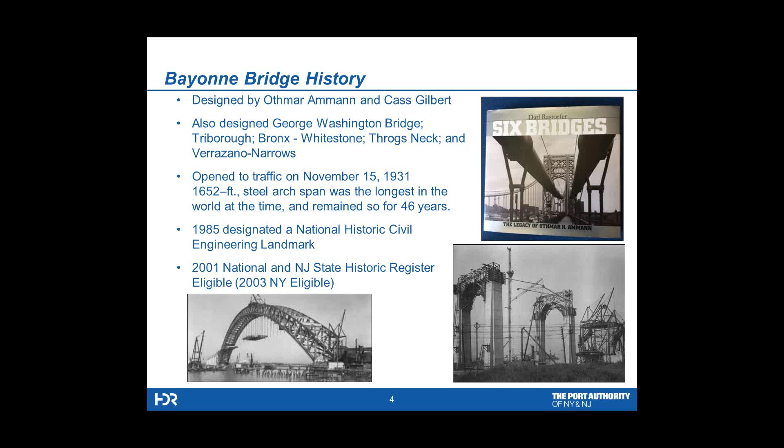So the existing facility is about 7,000 feet long when you combine the approaches in New York on the left and New Jersey right. And the bridge itself spans over a shipping channel called Kill Van Kull, and that's the entrance to the container facilities.

And if you look in the lower left-hand picture, that's just a barge, but the container facilities are to the right on the other side of the bridge.

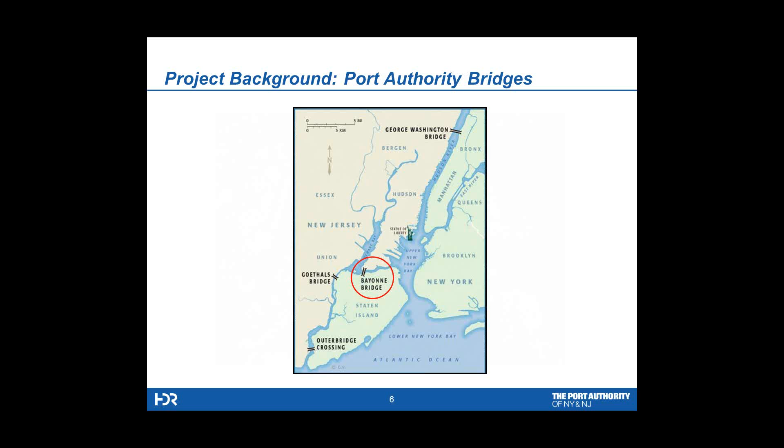The Bayonne Bridge connects New Jersey at Bayonne into a borough of New York City called Staten Island. You can see the Bayonne Bridge down there on the southern edge of the peninsula going into Staten Island.

The big interest in the Bayonne Bridge, it only carries 22,000 vehicles a day, but it happens to be in a location where we can see the shipping patterns for the

containers come in from the lower bay of New York, which is on the right, and going under the Verrazano. And then it goes under the Bayonne Bridge and it heads towards Port Elizabeth and Port Newark, which are the container facilities.

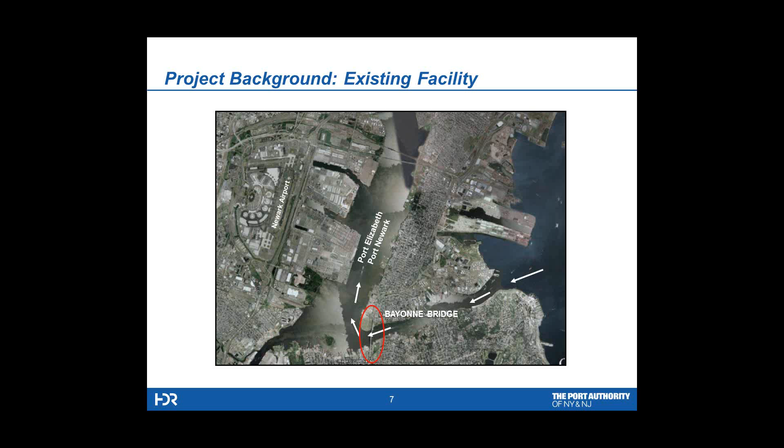So all traffic going to Port Elizabeth and Newark needs to go under the Bayonne Bridge. The current, what's called air draft, is 151 feet. The water draft was recently dredged to a 50-foot depth.

So the expansion of the Panama Canal, we're going to have bigger ships. The design is for 215 feet for Bayonne. The newer ships, the 13,000 container ships, are going to be about 200 feet in height above the water. The Verrazano Bridge, which they must go under first, is around 220 feet currently.

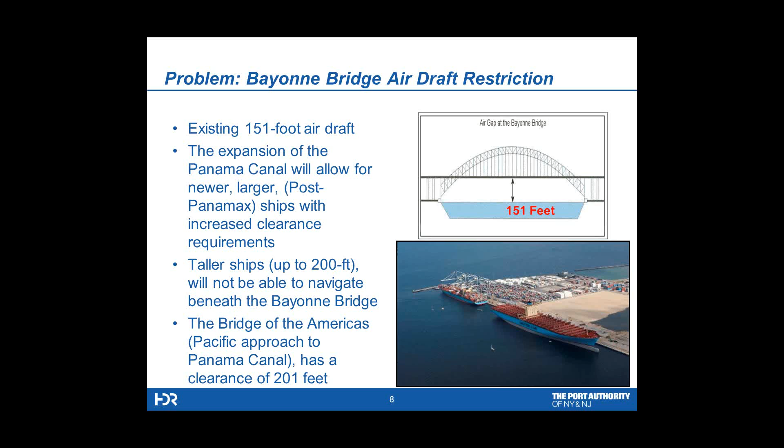So here's the cause and the reason for the project. We have basically a service of 5,000 TEUs, a TEU being a term to denote a container, and we're currently servicing 5,000 TEU ships at the port. We're expecting now to go to 13,000 TEU ships, which will require the 215 vertical clearance. If this was not done, it's got some economic impact to either the shippers or to the end users.

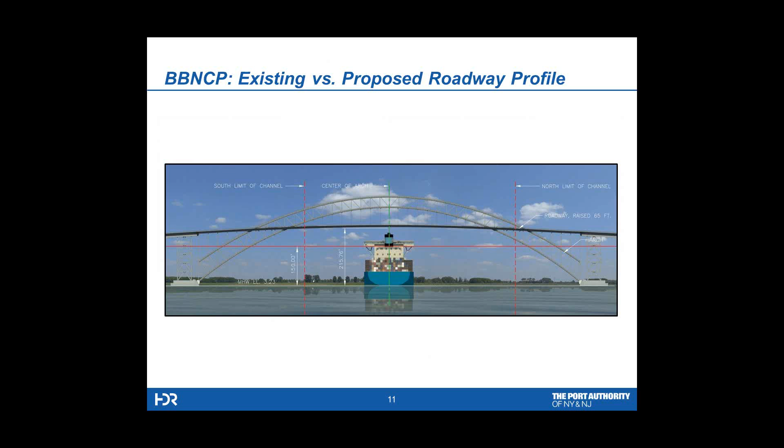So here you can see a graphic of the changes that we're making. The red line going through the ship is 150 feet approximately above mean water, and we're taking it up to 215 feet at the center line of the channel.

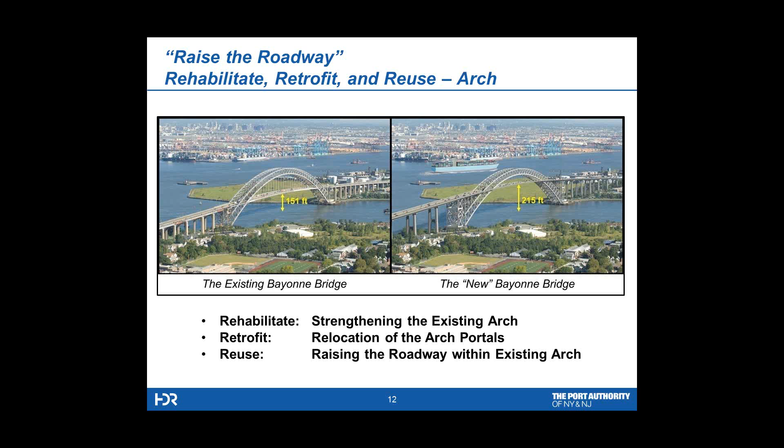So for the project description and design, we added a 12-foot shared use path. We put in median barrier, shoulders on the approaches, acceleration and deceleration lanes, a whole new power and communication system, new tower structures at the interface of the approaches and the arch, and mechanical electric buildings in both New York and New Jersey, plus a big storage facility building in New York. The new towers we're building will have new electric service as a distribution point.

We also put in a closed drainage system. The existing bridge just dumps the water over the side, which now we're collecting and moving to retention and filtration ponds.

The arch, which is the main feature of the project, involves quite a bit of work. We're strengthening the arch to take the new loads, putting in an entirely new floor system with new suspenders, and an edge girder system, which we'll talk about, which supports the hangers and suspenders.

We're doing repairs that were part of the biennial inspection. As construction goes on, we sometimes uncover issues that need repair that weren't obvious in a biennial inspection.

There's obviously some demolition work to get rid of the existing arch floor system. The approaches have entirely new foundations, columns that are precast segmental, and new superstructure which is also precast segmental, with a complete demolition to 3 feet below ground of the existing substructure, which is pretty massive, in addition to removal of the two-girder system that is the superstructure.

Here we can see an in-depth inspection by our staff, assisted by people certified in level 1 and level 3 climbing. Our inspectors were certified level 1, so we had professional assistance doing a hands-on inspection of this arch using rope access for the most part.

Here you can get a little sense of the size of the project when you see that person climbing up the suspender system on the left, then walking across the top as a container ship is leaving port and heading out to sea.

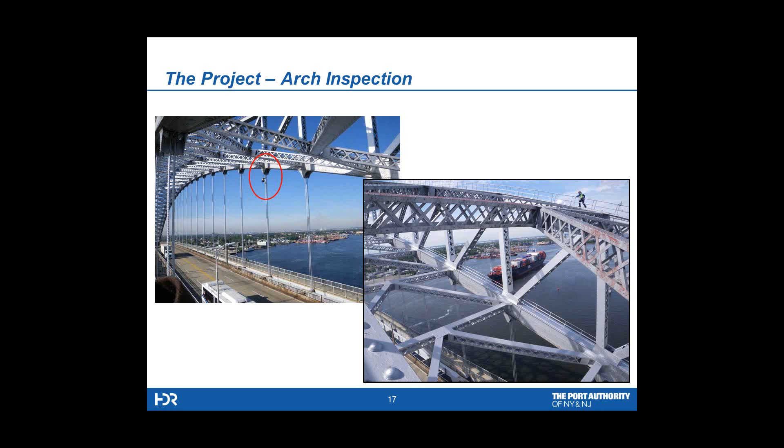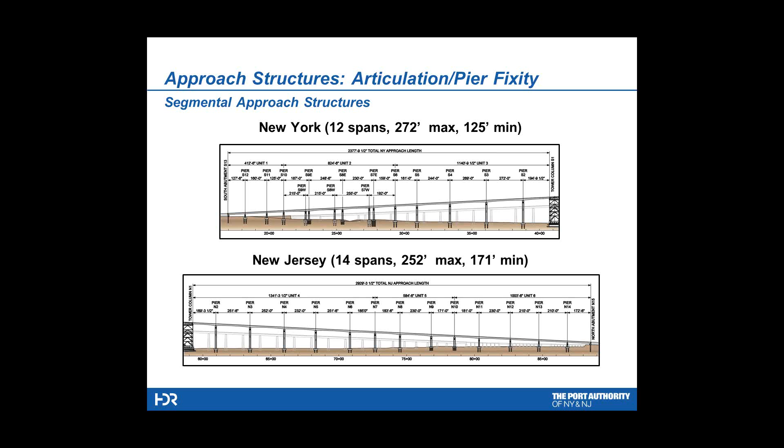In New Jersey, we have 14 spans at the low end, running anywhere from 125 to 171 feet, but as you get to the taller spans we're ranging from 252 to 272 feet. It's a pretty diverse range of spans, but they're all being erected and constructed using precast segmental erected by balanced cantilever.

So here's the cross section of the new box girders, side-by-side box girders in the approaches with a 1-foot gap between the structures. You can see the very wide box on the northbound side because it accommodates the 12-foot shared use path.

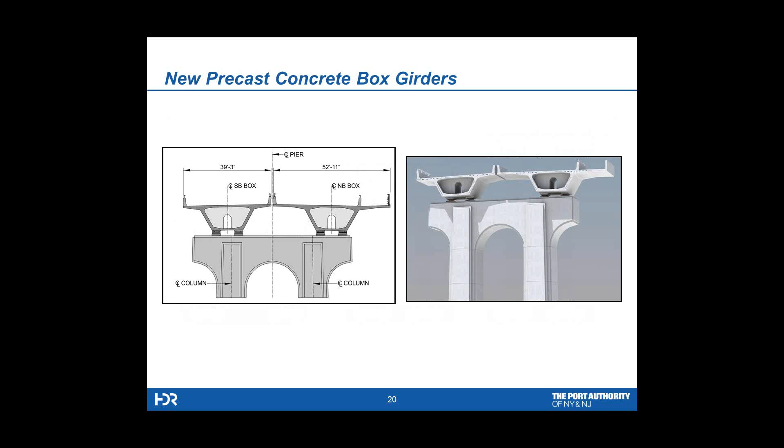The piers are replicas of the original piers to the best that we were able to do it, so that we're honoring the architecture of the original bridge. Here we can see the 3 types of piers that we had: twin single column piers, a double pier with a unified cap at the top, and for the very tall piers, which get up to about 160 feet, we put in an intermediate strut roughly 100 feet above the ground.

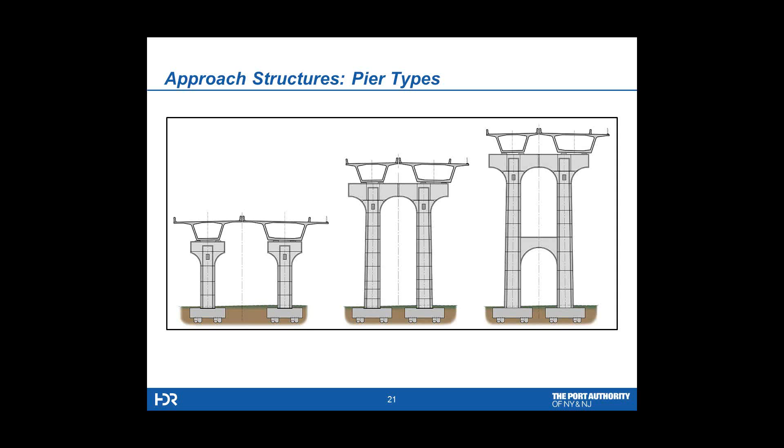During the construction, we started with a concept for the tall piers, partially the southbound pier, which is the one on the left in red, with the transverse strut at the lower level. The purpose of that was to brace the northbound pier on the right-hand side of the third graphic.

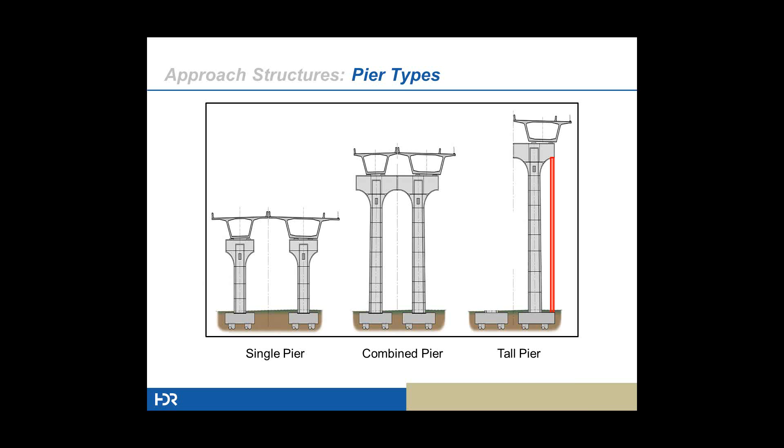We worked with the contractor after the bid, and we came up with an alternative to not require erection of the southbound side, but we put in a pipe strut which provided the bracing. You can see on the northbound side up at the top that the box girder loading is eccentric on the pier, so there was a tendency to bend the pier and move to the right. So that's ongoing right now.

You can see one of the pipe struts. This is at pier N8, where N1 is closest to the water. You can see the pipe strut installed and the intermediate bracing that we attached to the precast concrete column to cut down the bending length of the pipe. This is a 60-inch pipe with about 1 3/4 inch wall thickness, and it takes up to about 2,000 kips of load.

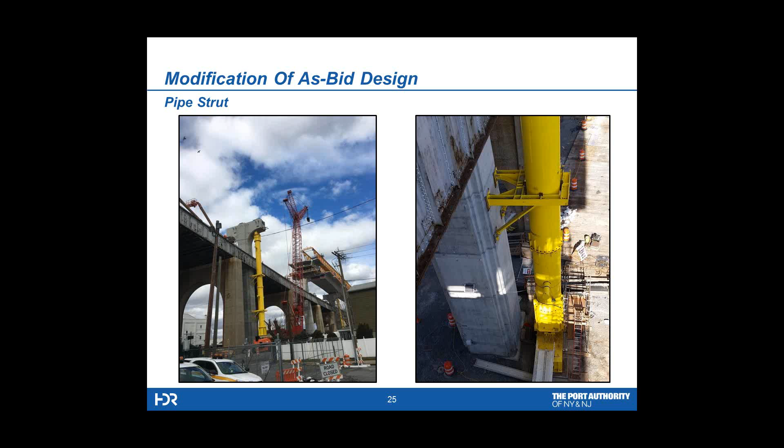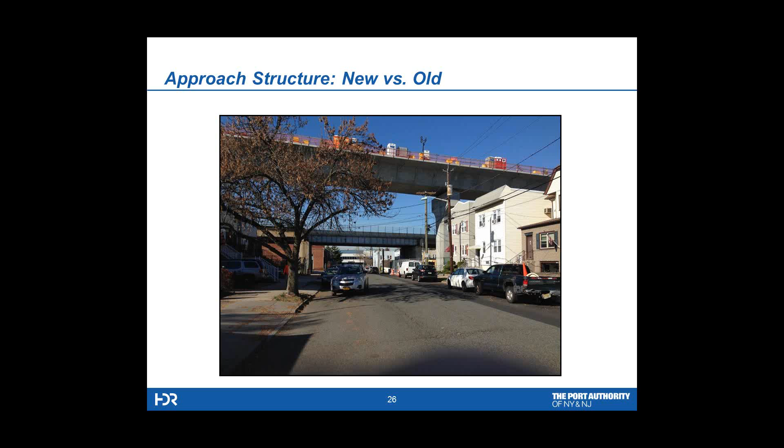Here you can see visually what the difference in the profiles are. In the foreground, we have the new segmental box girder. In the background, we have the existing steel two-girder system. The difference in the profile in this area is approximately 40 feet, so it's a pretty significant difference for the people living in the neighborhoods.

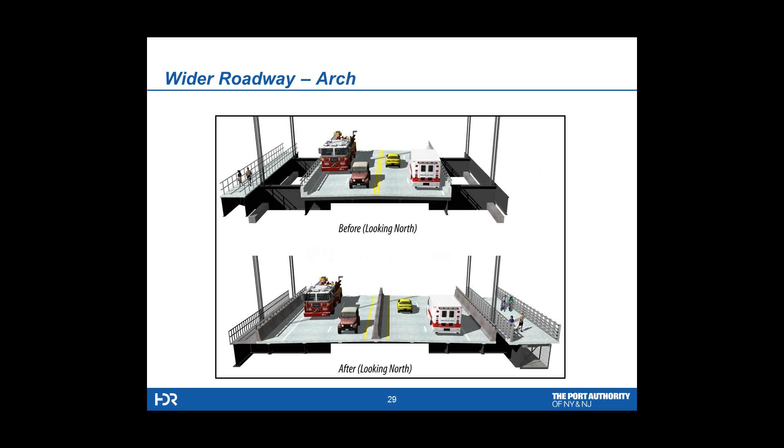Here's a nice cross-section extruded of the existing bridge looking north with 4 10-foot lanes, and the new bridge with the same 4 lanes, except now with a median barrier and shoulder. On the right-hand side, you can see the shared use path. Real quickly, you can see underneath we put a utility gallery where we could run all the conduits and power supply for the bridge. The design addressed 3 fundamental loading cases: the base loading, which is your vehicular,

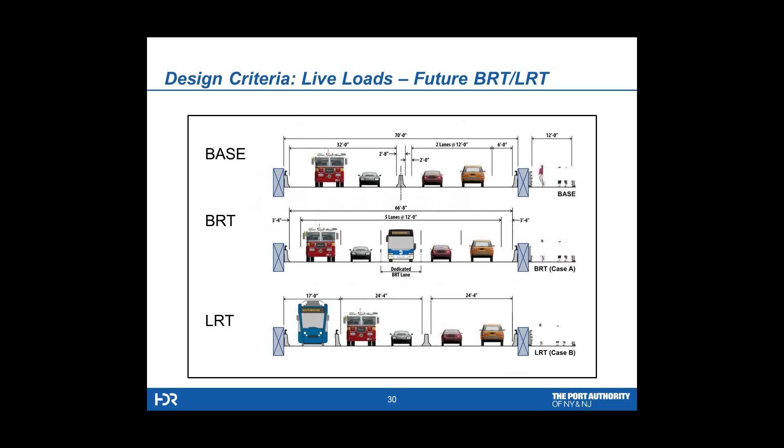typical AASHTO LRFD loading, and then we also took a look at and included a bus rapid transit with a dedicated lane in the center. The third option that we looked at and included in the design is an LRT, light rail transit, which would be an extension of the Hudson-Bergen line, which currently stops about 4 miles short of the bridge. The feeling was in the future we should be able to connect the light rail transit to take people into Staten Island from the New Jersey side. So all these were included in the design, and obviously we designed for the worst case generated by those loads.

Looking quickly at the original loading from the design documents back then, Ammann had the foresight to include a transit load, which he took as a fraction of an E60 loading, and then we had the car loading back then. Live loads have actually reduced a little bit now to 540 pounds per linear foot, but the intensity of the shared use path load has gone up. Looking at the lower sketch, you can see we did include the light rail with a very specific vehicle that's used for Hudson-Bergen.

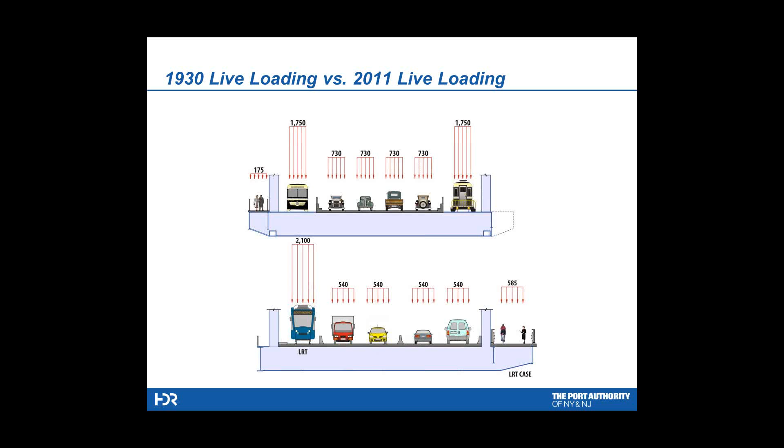We're going through some loading patterns. It turns out that, because of the introduction and original design of the transit loading, the E60, the actual loads on the bridge were comparable to the original design, with the big exception that the shared use path on the right-hand side introduced an eccentricity.

That tended to dominate the design when combined with wind. So here we see what we call the non-suspended part of the arch.

It's a column system that we're bracing into the existing chords of the existing bridge. We're building a column system that looks very similar in nature. Those are plasma cut plates to replicate the original architecture. And then we have the sway bracing, and an entirely new floor system at the top consisting of floor beams, stringers, and lateral bracing.

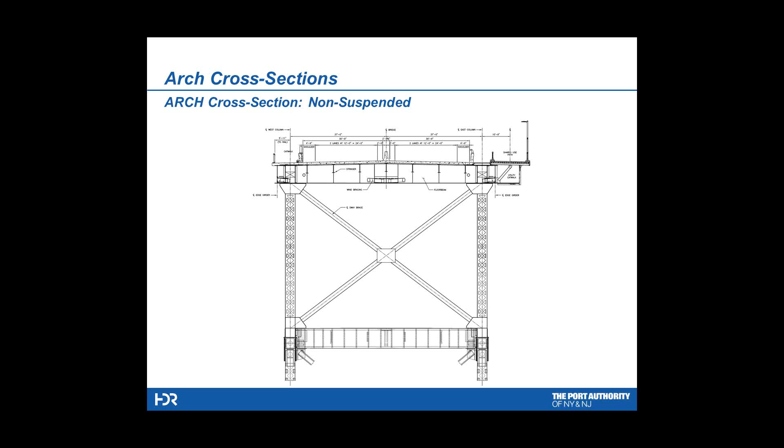You can see on the left-hand side a catwalk, which is for utility and maintenance purposes, and on the right-hand side, the shared use path with its own lighting system. Underneath the shared use path, we have a utility gallery where most of the utilities are contained.

So a blow-up of the cross-section: it's a pretty classical floor beam design with suspenders on either side, plus what we call edge girders, because our design criteria required us to consider the loss of two suspender sets consecutively. So we needed a bending member on the outside edge, and we included an edge girder that could take such a load.

Going back quickly, the deck is a lightweight concrete deck. We were fighting load on the bridge and wanted to minimize it as much as possible, so we used 125 pounds per cubic foot lightweight concrete in the specifications.

They're busy now testing that material because we're not terribly far from pouring some of the deck in the arch.

So what the work consisted of: we had existing arch chords, floor beams used as bracing members, and we considered strengthening those areas, redoing some bracing, and adding columns where we needed to increase the height to a fixed floor system off the arch.

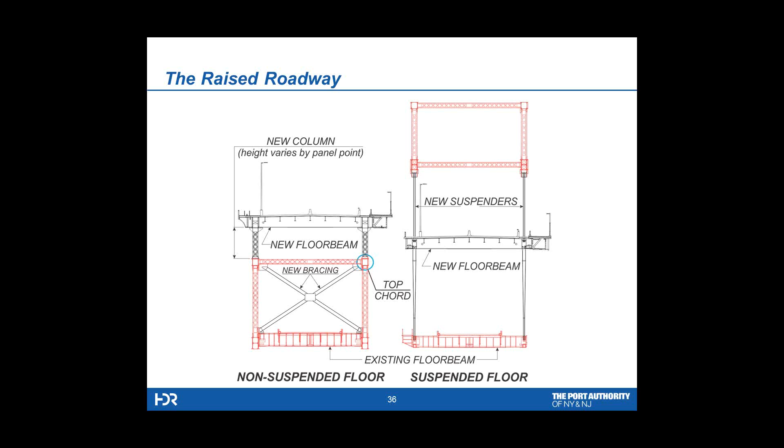Where we had a suspended span, we put in new suspenders, and you can see the difference between the existing floor beam and the new floor beam. We'll go through a sequence showing how we're able to replace the floor beams, and eventually we'll be demolishing the existing floor beam at the bottom.

So again, just more definition. The statical scheme for the arch is that we have tower structures that bracket the arch structure, and that's really to accommodate the transition from the approaches into the arch structure. Panel point 0 is actually inside the tower structure.

For the purposes of the deck, we have deck joints: an expansion joint at the south side, panel point 10 south, and a pin joint at panel point 10 north. We're able to run the deck over the tower so that the big expansion joints are not near panel point 0, because there's been a history of maintenance issues with leakage running down the main verticals at panel point 0. So now the joint will be placed over the tower.

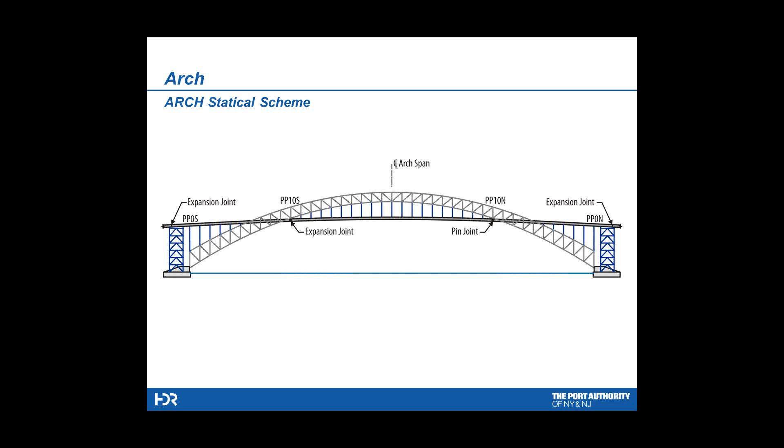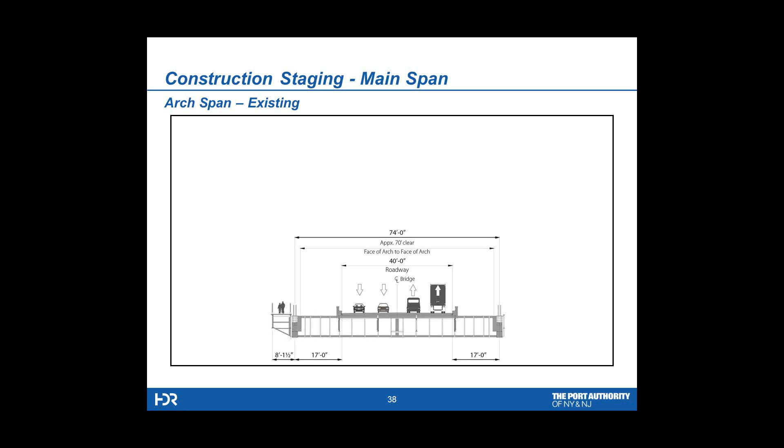Quick introduction and discussion of the staging. We have the existing bridge with four 10-foot lanes and a 6-foot clear sidewalk on the left-hand side.

In the first stage, we demolish as much work as possible, removing as much dead load as possible to the west side, the left side. Using temporary barriers, we're able to take out the sidewalk, some bracing, and some steel work, and we provided 12.5-foot lanes for two lanes of traffic. Throughout construction, we maintain one lane of traffic in each direction.

In the second stage, we move the temporary concrete barrier to the east side and partially demolish the existing deck, again taking out as much dead load as possible.

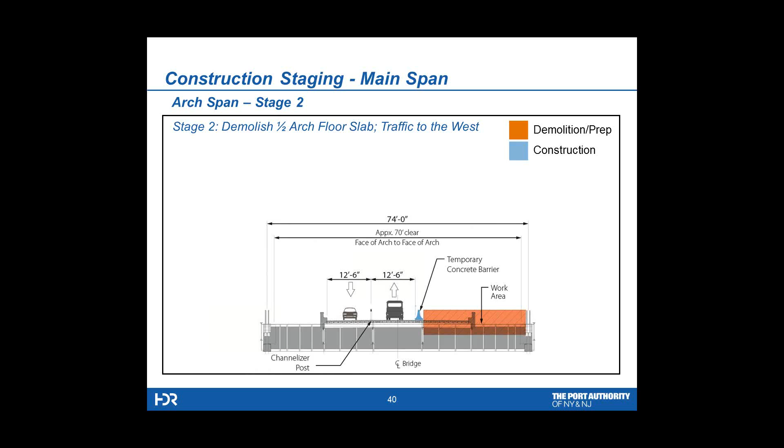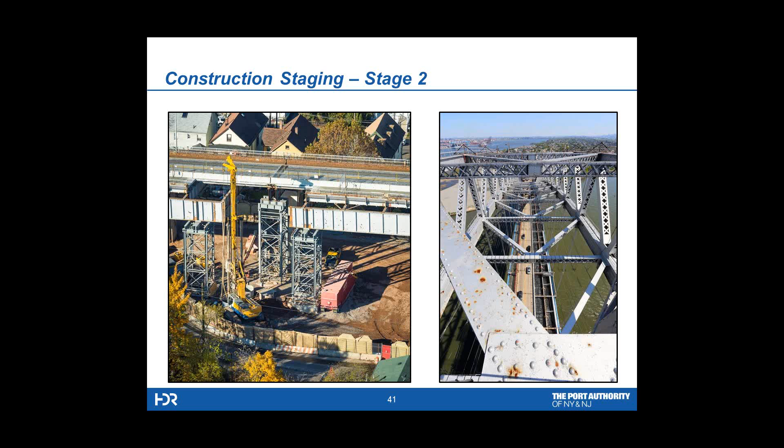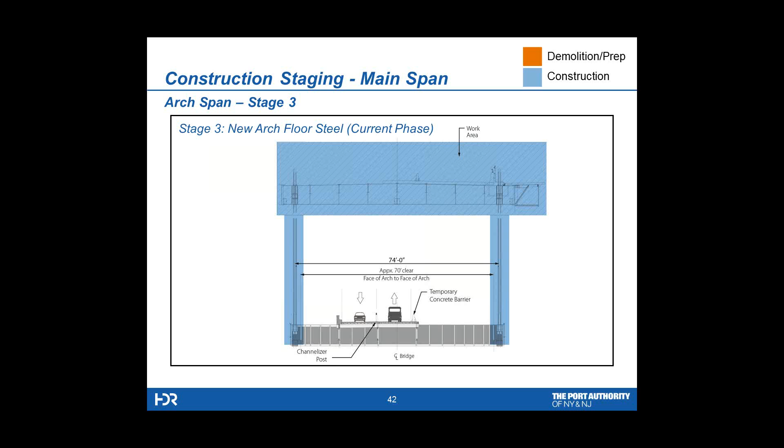Level 3, or stage 3, is where we are currently. We are removing the existing suspenders and getting in the new floor beam systems, and we'll show you the sequence for that, all while maintaining one lane of traffic on the lower, existing roadway. So right now we're working on the upper roadway, the new flooring system.

Then we go to stage 4, when the upper level is constructed. About half the roadway, half the cross section, we're able to put traffic up top, and we will then proceed to demolish the existing arch floor, which is really the goal of this project, because that's what would be blocking the new ships from coming in.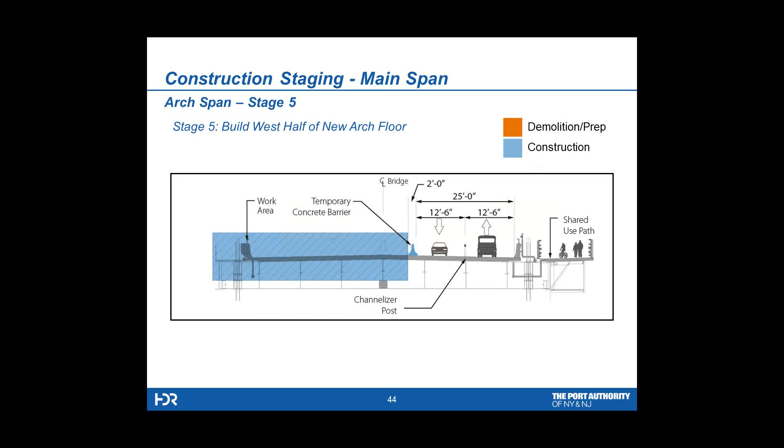Stage 5 then, once the lower floor and existing floor are demolished, we go back up and finish the work at the upper level and complete the roadway to provide 4 lanes of traffic as it was before the project started.

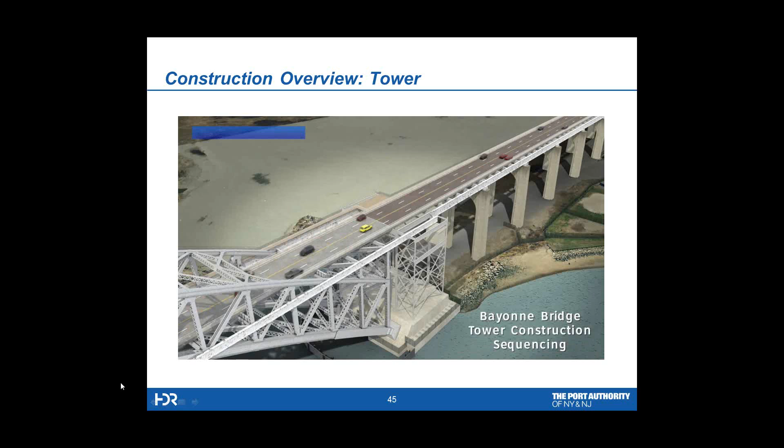Here's a quick video to explain how we worked around the towers. We can see the tower structure. We removed as much material as we could, and we also diverted the traffic to the west to get clearance as part of the overall traffic staging plan, again removing as much dead load as possible ahead of time.

We built a new tower around the existing towers, to the extent that we could without interference to the traffic up above. We then pushed the traffic to the west side so that we could have access and demolish the roadway slab.

There you can see it, and then you can see the new tower structure going in, basically surrounding the existing one. We built the new electrical floor, which is the distribution center for the electrical services, and then we put the new floor system on top.

We then proceed, and we're now getting ready to cast the roadway over the tower area. And then we'll get the traffic pushed up to the upper level, and that would free up the demolition of the lower levels and the completion of the structure, not only for the arch and the approaches, but also for the tower structure.

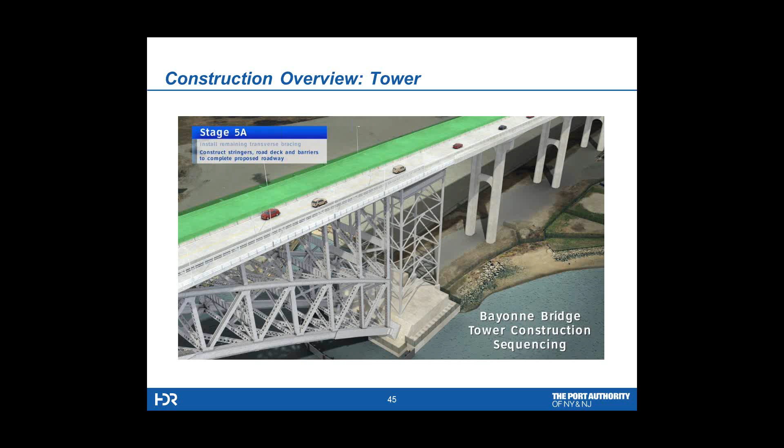We'll complete the bracing that we couldn't get access to. We'll construct stringers and floor system, and then we'll get the utility catwalk put in, all the finishing work with all the access, and then we'll demolish the existing tower structure and put in the new permanent median barrier and get traffic up to 2 lanes in each direction.

Talking about computer analysis, the bid set contained 37 sequence drawings for the arch and the tower. We've had 3 revisions to the as-bid sequence proposed by the contractor, and we checked it out for him. Here's just one of the sample drawings of the sequences. You can see they're rather detailed, and they go through many steps, step by step.

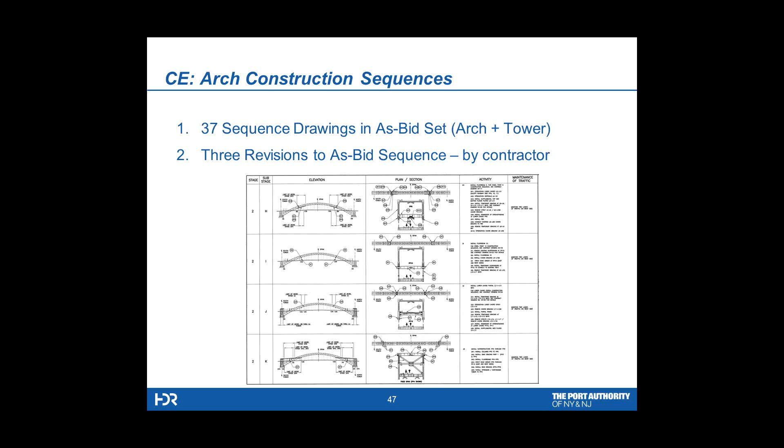So that was the blueprint for unloading the arch, strengthening it, and then reloading the arch. All that work was performed by the designers.

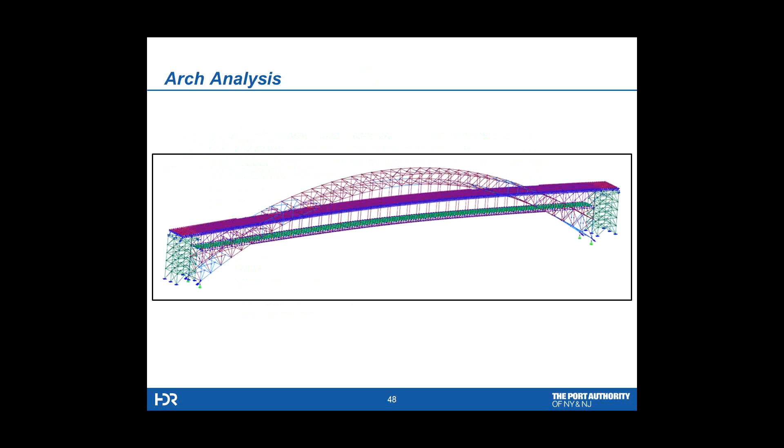Here's the arch model, with both roadway levels, new and old, and we went through stage construction. It had about 14,000 nodes, 14,000 members. The deck was modeled with plates. We had springs, master-slave nodes, 296 sections, 544 static load cases.

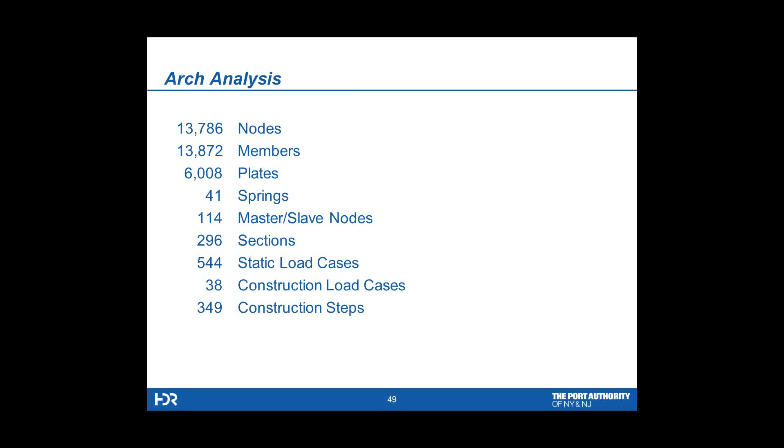We had 38 construction load cases, including 349 construction steps, so it was a pretty significant computer effort. This just tells you all the work really that we did going through this thing step by step. The only thing that was time dependent in here would be the concrete, where we would have creep and shrinkage and strength gain with age.

We were able to calibrate the model geometry with survey data, so we got good response correlation there, and we provided the stage construction results for geometry control and the determination of cambers for the new members.

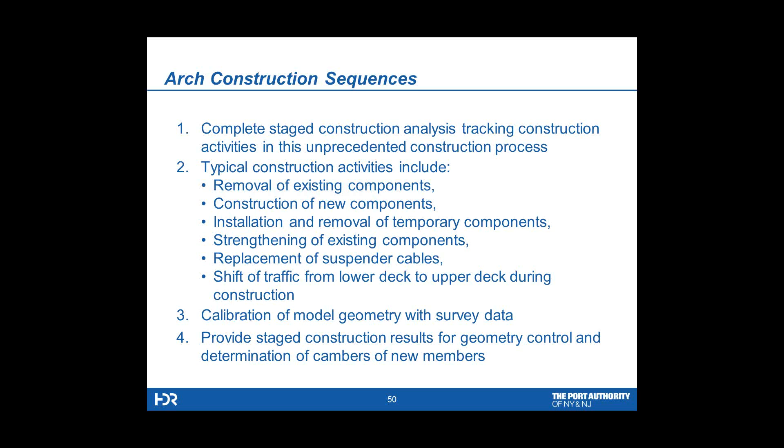The really big work here in terms of difficulty is arch strengthening, and the three main areas were: the end vertical, where we had a lower chord with most of the new forces coming in; at panel point 10, and around panel point 10, we had a new portal to cut in; and at the center of the bridge, we had some strengthening work for the section which had actually the least amount of compression in it.

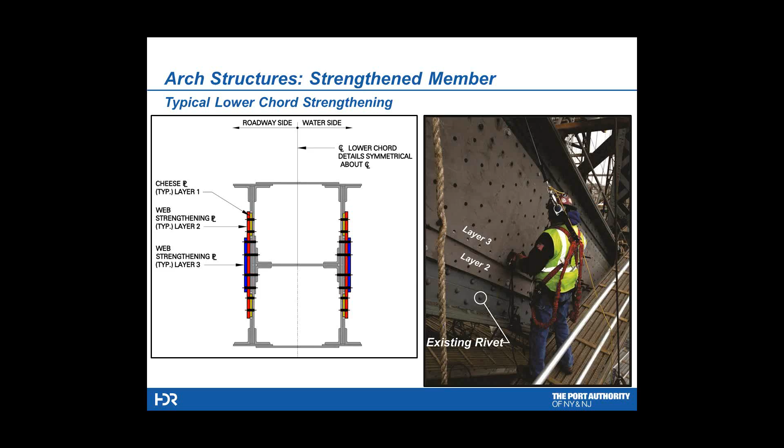And then on the gussets, the lower chord that we see here is not continuous through the node - the plates stop where the diagonals and verticals come in. But for continuity of the strengthening, we had to put in splice plates across the node, and then increased strengthening plates to connect strengthened diagonals and verticals.

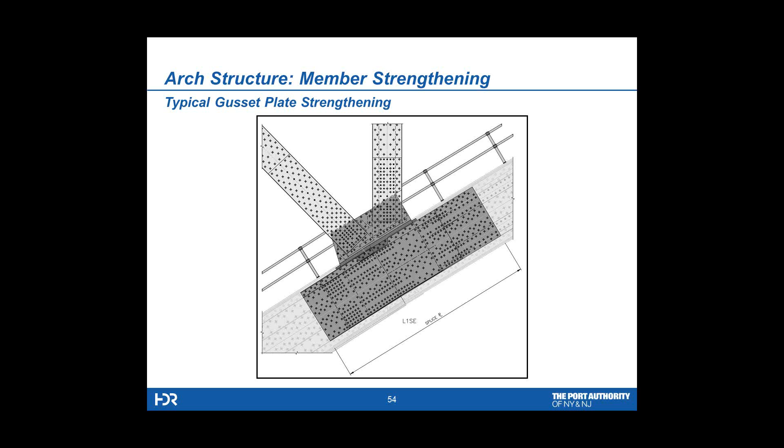So there's well over 1 million bolts on this project, and it's just very, very tedious work. But it is what it is.

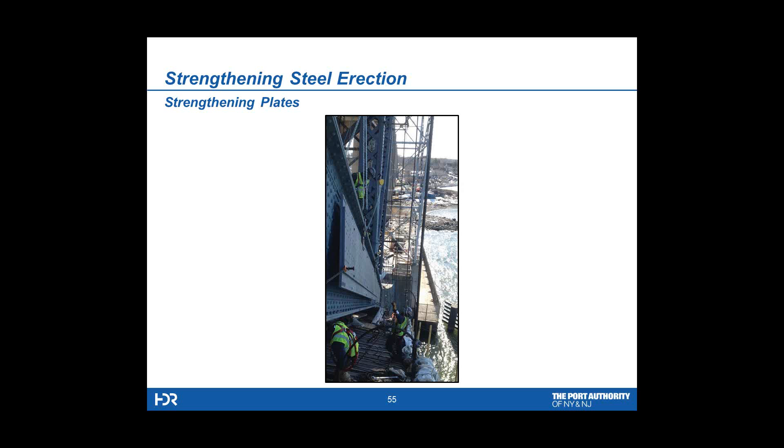So here we can see them erecting a steel strengthening plate - that's layer 2 and layer 3 in one shot. And these plates are roughly 12 feet, 10 feet deep, and depending on your panel length, they could be anywhere from 30 to 42 feet in length. So it's a major addition of steel.

And just a look from the outside looking in, you can see splice plates at the nodes, strengthening of verticals and diagonals. So roughly the total project has over 10,000 tons of new steel, including the floor system.

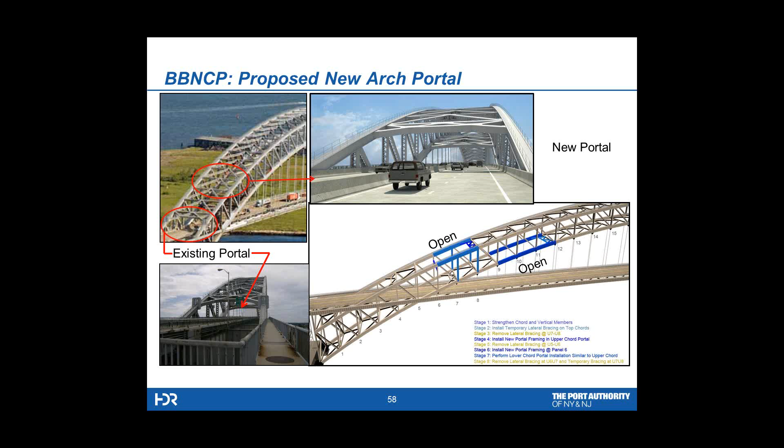The new portals - you can see the cars in the existing picture going through portals. Obviously, they need to traverse through the cross-frame system, so we put a portal in. Now we have to move up the arch to a much flatter location to cut a new portal into the structure. We designed all the sequences step-by-step, an 8-step approach to accomplish that work.

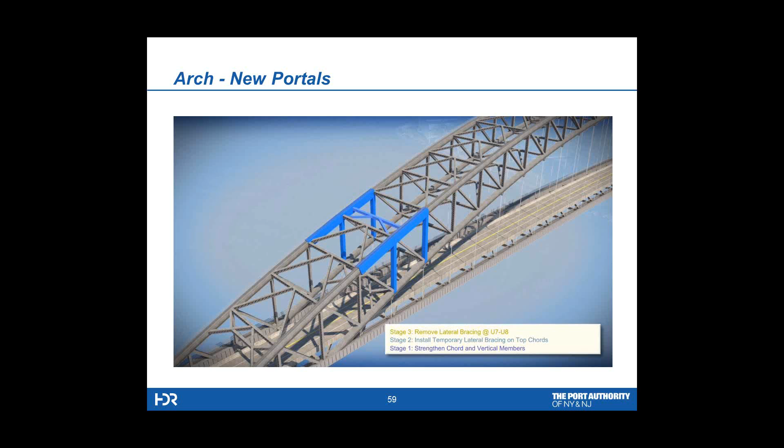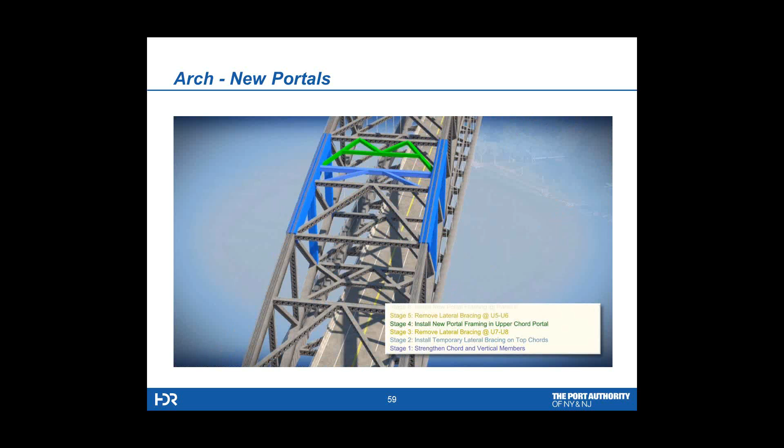And here's a quick video of the portal sequence, where you can see starting out with the existing structure to the left, and then adding in strengthening of verticals and chords, putting in new bracing, temporary bracing, building the new portal framing, and then removing some of the lateral bracing to accommodate the cars in the new configuration.

And here we go to the lower chord portal with its bracing. All these stages had temporary bracing to keep the structure stable. And then we finish up with a new portal at an upper level, a flatter level along the truss, along the arch.

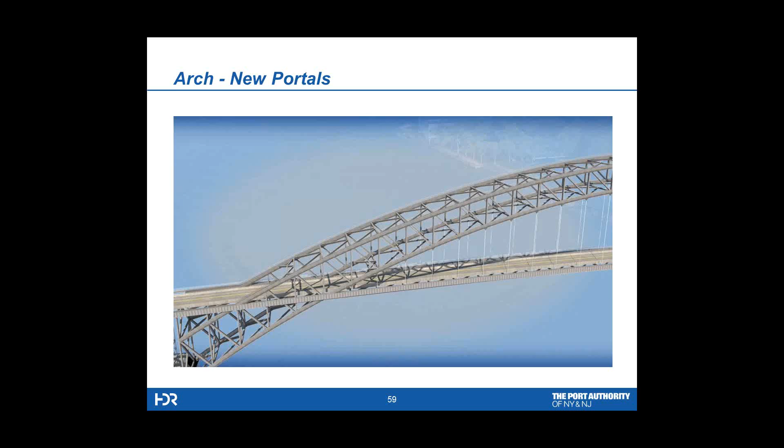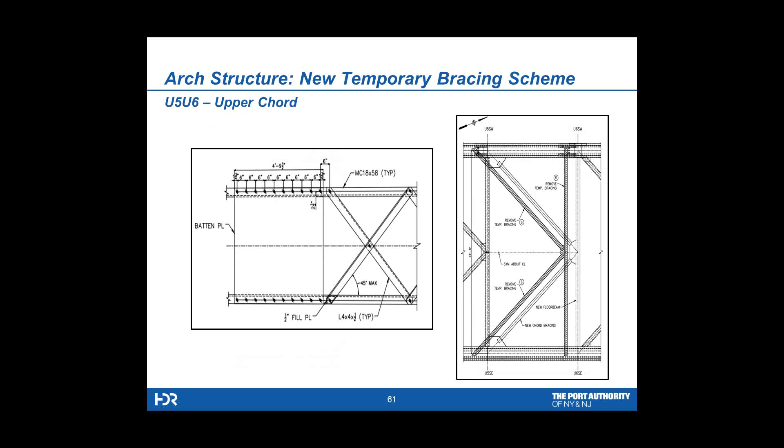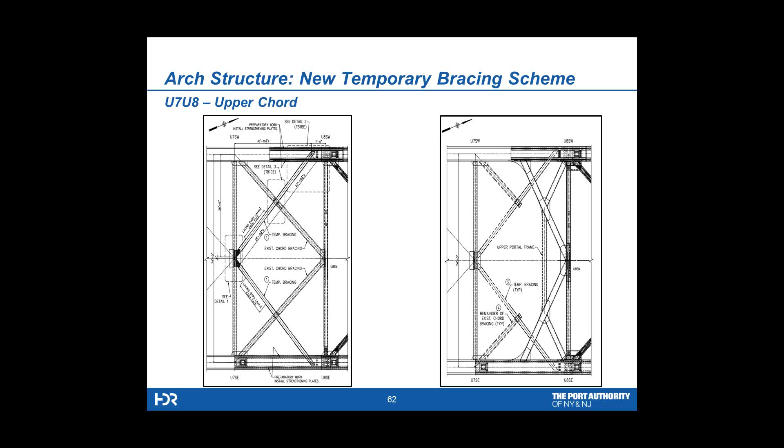So the temporary braces, as I said, we had an 8-step sequence to adding them. We designed them, and the contractor detailed the connections and the geometry to work out sequences to allow certain members to be either removed or strengthened. And it was all detailed in the bid set.

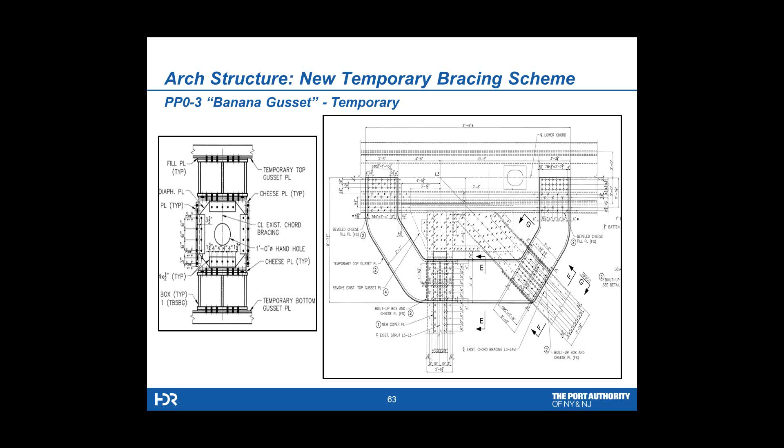The contractor actually came up with this design. We did the design work, and of course we have to run finite elements to show that the stresses are okay, and the sequences work. Here you can see the banana gussets in action, where we put them above and below the chord. We're able then to frame in existing lateral members to enable remediation work, either strengthening or gusset additions. That all worked very well, but again, very time consuming.

The new arch floor is a concept that we came up with and put in the bid set. The contractor tried to come up with a better way of doing it, but finally concluded this is the way to do it. We originally showed a gantry crane on top, similar to what was used for the original construction. They eventually decided to go with cranes on the existing deck, but in principle it's the same thing.

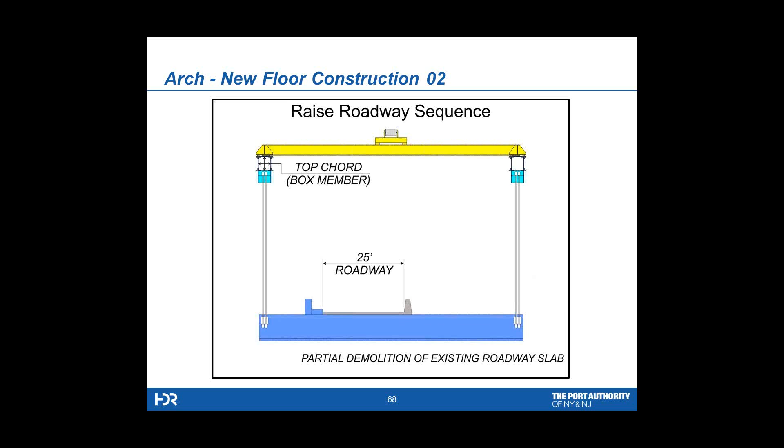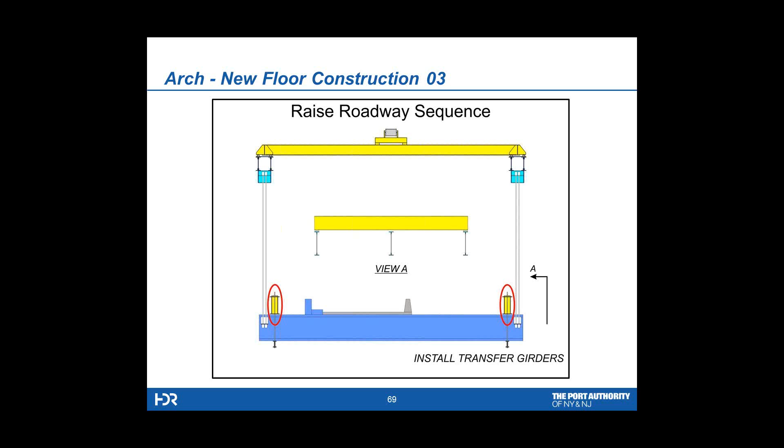So we have a top chord, or box member, with a hanger to a floor beam system down below, and we push the traffic to the west, or to the left, and demolish the roadway slab. We then put in what we call transfer girders, and they span 3 floor beams - actually 2 floor beams with a floor beam in the center. If you look at view A, you can see 3 floor beams in cross section, and these are roughly 41 and a half feet center to center. So we span the outer existing floor beams.

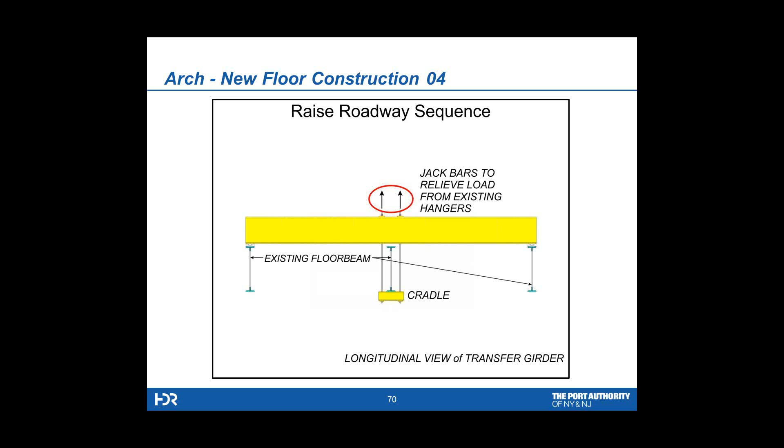We then put in a jacking system to take the load off the middle floor beam. When that floor is off, you can see the system, basically a cradle, to pick up the reaction and transfer it to either side. Once the transfer girders have the load removed, we can then remove the existing suspenders.

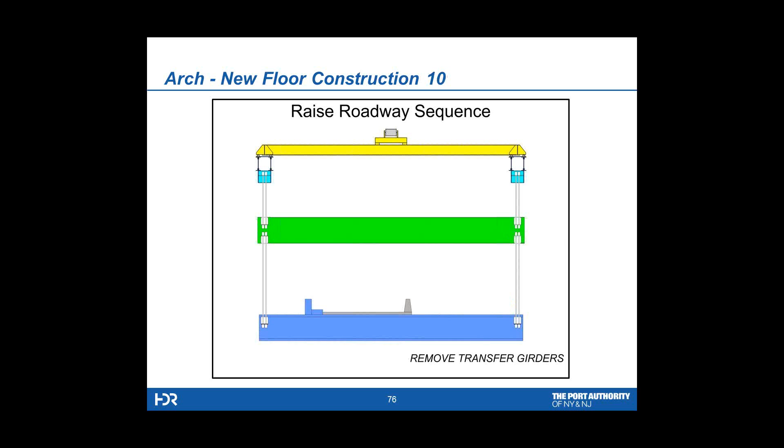We can erect the new floor beam at the higher level. We then connect the permanent suspenders to the chord down to the floor beam, and we put in temporary suspenders to replicate the support of the existing floor beam at the lower level. That enables us to keep the construction process moving. This is done floor beam by floor beam.

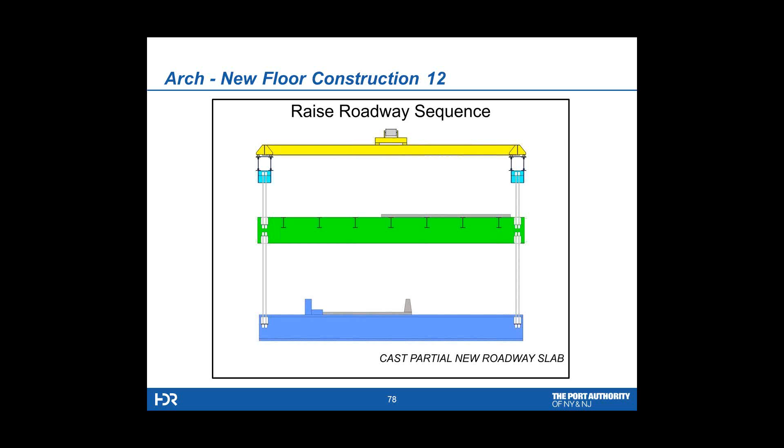At the upper level, they'll now be putting in stringers between the floor beams, and eventually cast the lightweight deck about half width to enable the cars to go up top. At that point, once traffic is transferred up top, we can demolish the lower floor beam.

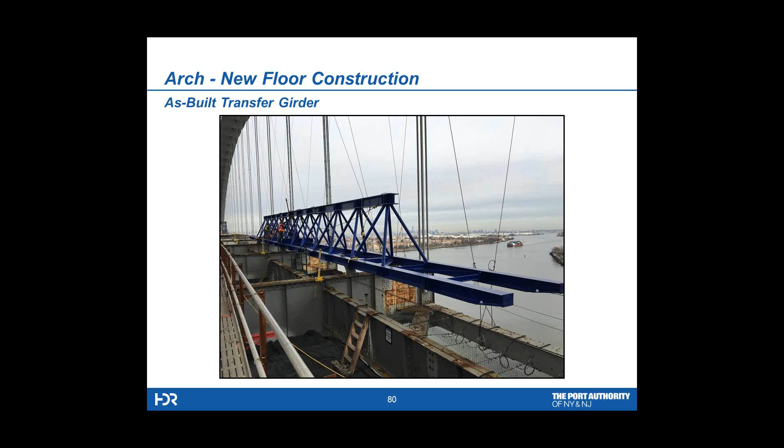For the transfer girder, we actually showed a box girder, but the contractor came up with a truss design that they produced, signed and sealed, and fabricated. We checked it, and they came up with this truss. You can see the blocking against 3 consecutive floor beams, and the center one is where the jacking will occur, such that you could remove the suspender set. It's a 4-wire rope set that holds up each floor beam on each side.

To give you a construction update, the Port Authority of New York and New Jersey measures things quarterly, so we've spent approximately $700 million through December of 2015. We'll get the update in April for the spending, but there's approximately $495 million of construction in place. The bid was approximately $750 million.

We're pretty well advanced on the construction, at least on the northbound side. The foundations are all in for the northbound roadway. There's only 1 column now left to erect. The abutments are complete, and steel fabrication is virtually complete. The strengthening as of this date is more like 95% complete. The tower construction is complete, except for some final bracing that needs to go in. The approach spans at the time were 50% complete; they're now more like 2/3 complete.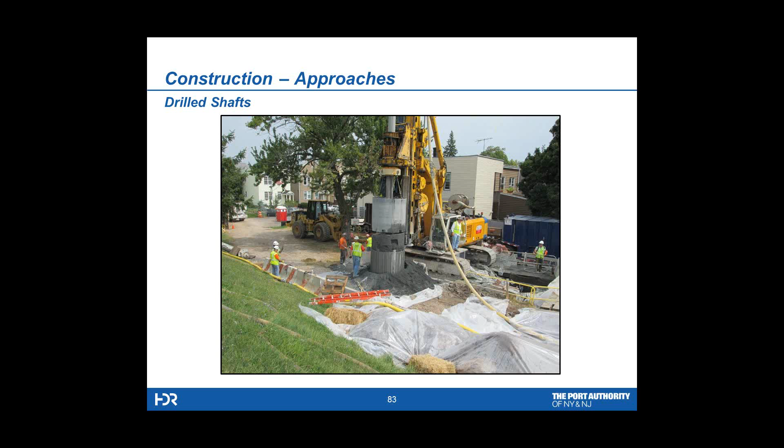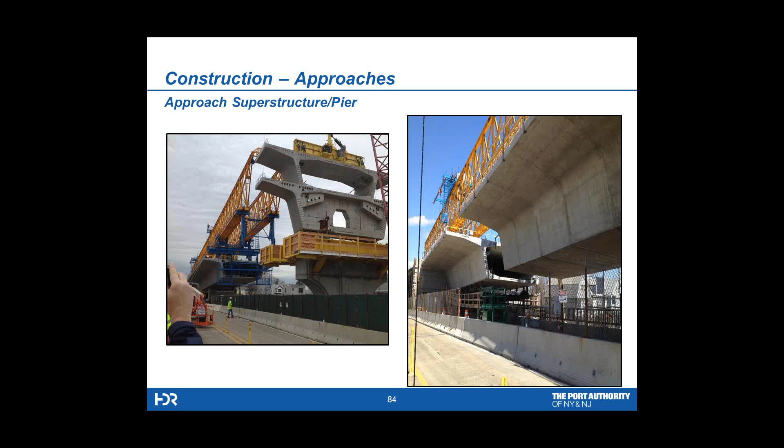The erection is by self-launching overhead gantry, and the pier tables, though, are erected by crane. Here we can just see some shots of the erection.

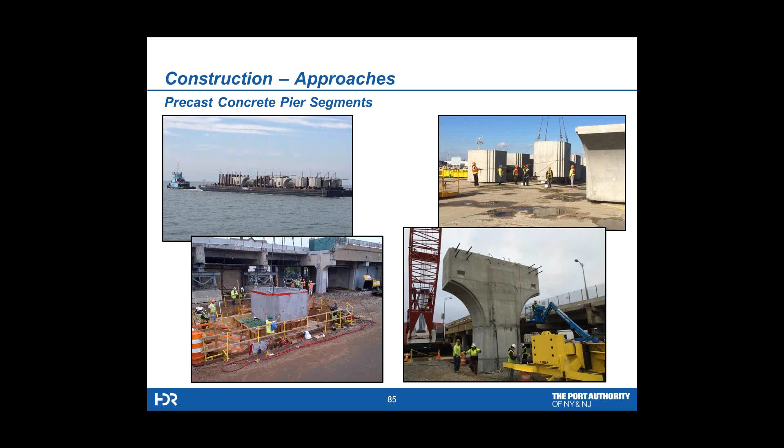Here you can see a precast pier, a low, short one, at the beginning of the project that's already erected. You can see the joints representing the precast segments.

Here you can see the shipping from Ports America in Jersey City to the site. All of that was planned out ahead, with utilities adjusted as needed, and stress calculations for load ratings done by the contractor.

Again, more erection of a pier table. The first three segments were erected by crane -- the pier segment itself and one on either side -- and then the gantry comes and erects the balance of the cantilever, which can go up to 15 segments on either side of the pier.

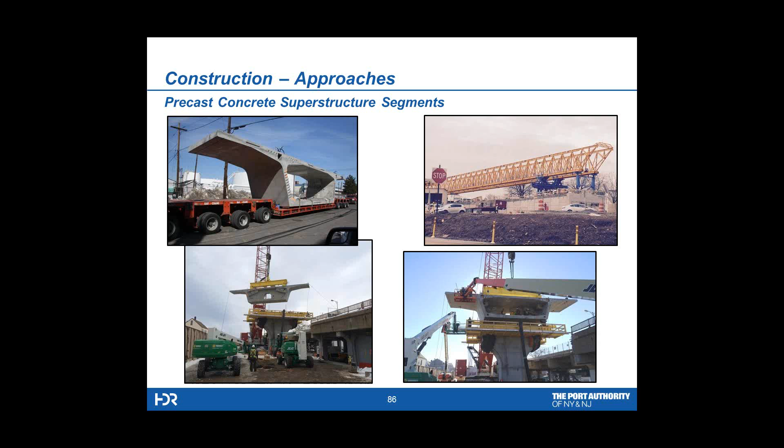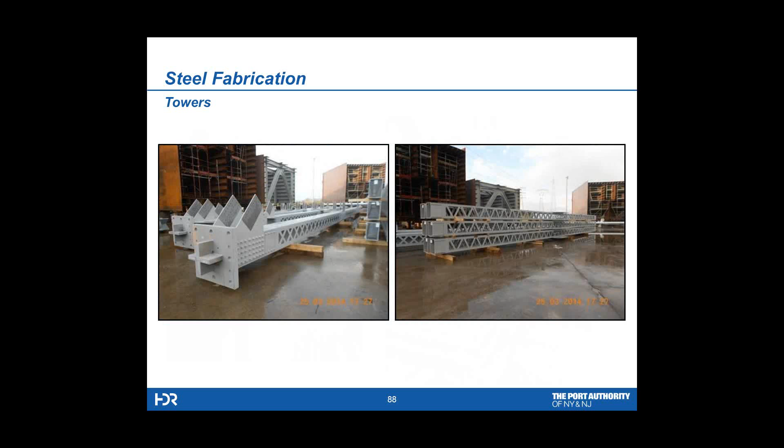Here you can see some of the tower pieces and column sections, which are cut to mimic the look of the lattice work on the original design. Here you can see some of the column sections, the tower sections, in storage in Italy before they went on the barge or on the ship.

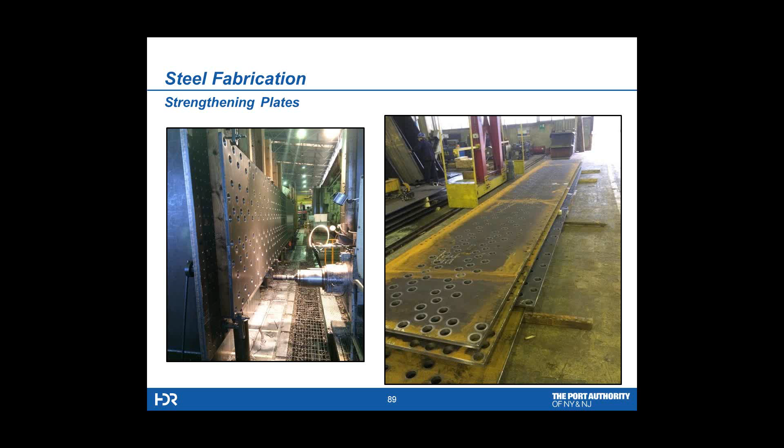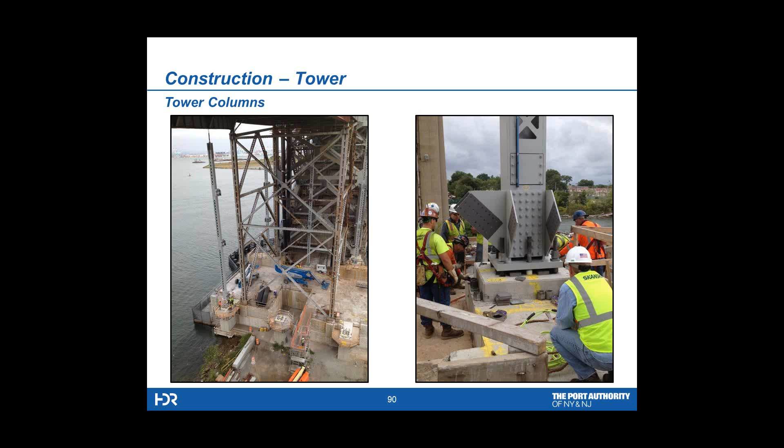Here you can see some of the tower work where we put new pedestals outside the limits of the existing tower, and you can see them fitting the new column sections onto the pedestals and being bolted into place.

Then, to get the major part of the column in, it was actually done from the deck level, and where necessary holes were drilled through the deck to drop the columns in.

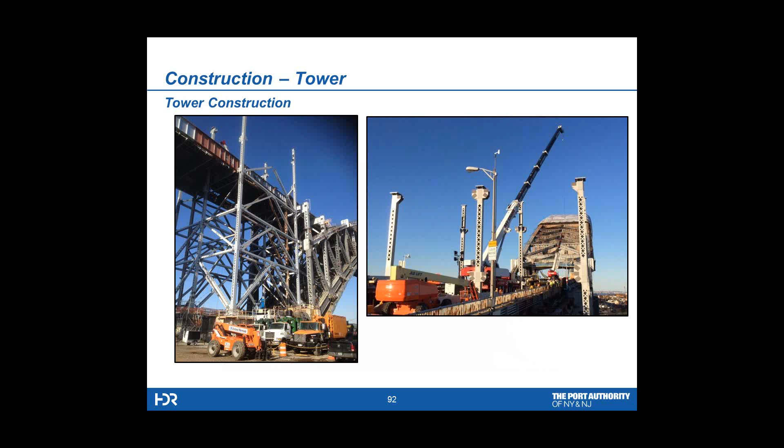Here you can see the columns going up above the deck level, and on the right-hand side the columns at their finished level for support of the floor beams that will go on top of them. Here you can see the addition of new gussets to increase or add in columns that will splice into existing columns below, for the non-suspended part of the arch.

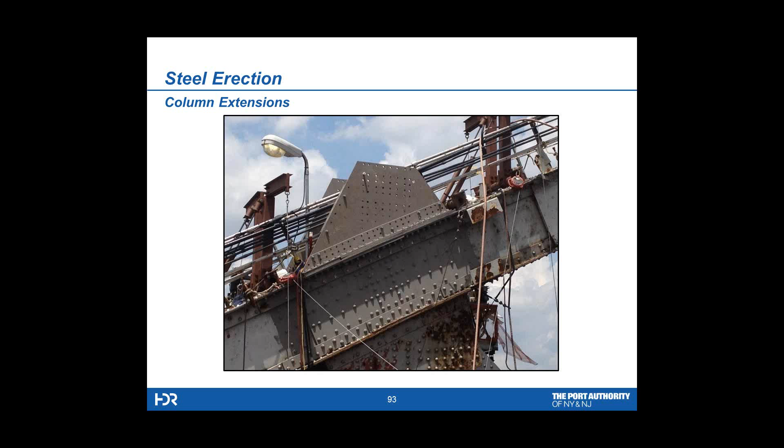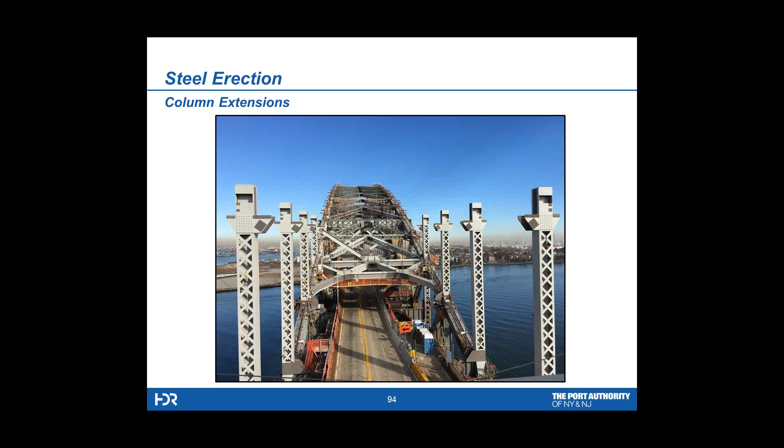Here you can see the columns being added to the upper chord to get us up to the new level of the floor system. That's what we call the non-suspended portion of the arch.

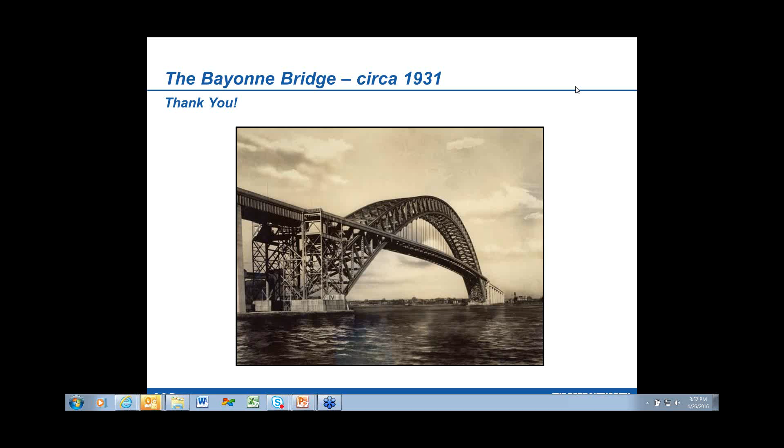Do you have it? Yes, I do. All right, and thank you so much for the presentation. Thank you for sharing about such inspiring work, very complex, but your thorough explanation was really great, gave great details and step by step how the project has progressed. Thank you very much. My pleasure.

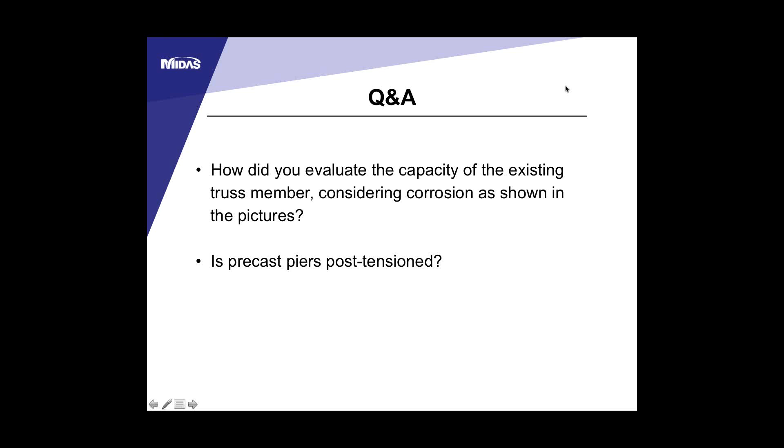I see. What about buckling check? Adding on to this question. Hang on a minute. I'm sorry. It's okay. So which one are we on? The corrosion or? Yes, and then adding on, what about the buckling check?

For the buckling check, actually the Bayonne Bridge is the best rated structure in the inventory for the Port Authority of New York and New Jersey. It's in extremely good shape. For corrosion, we made decisions on how to reduce a section and consider loss of section in a buckling analysis, which was done nonlinear, P-delta, geometry, materials, the whole bit, and we introduced an eccentricity to represent loss of section where needed. But we were pretty happy—either you had a very bad situation where the member had to be replaced, or if not, the existing bridge was actually in very, very good condition.

Was the precast pier post-tensioned? Yes, they're vertically post-tensioned using bars for the erection process, and then up to 31 strand tendons for the final post-tensioning in the pier.